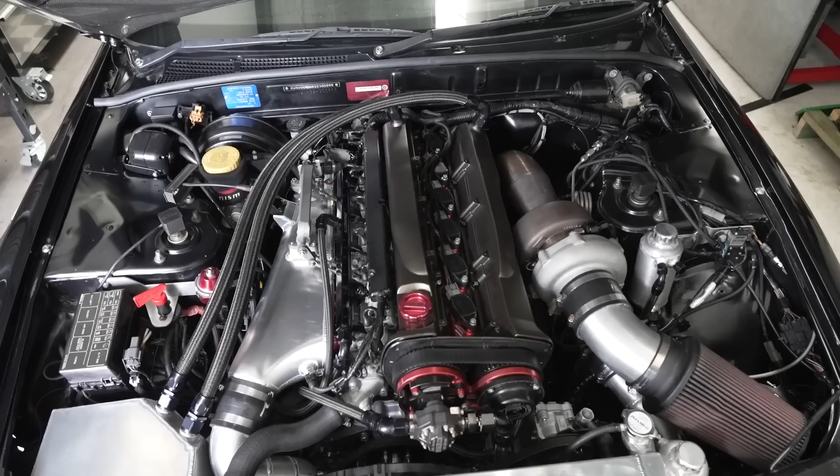In this episode of Motive's RB and GTR Tuning Guide, we talk about which oil you should put in your engine.

One of the most common questions we see asked online about the RB is what oil should I use? And the most common answers we see are, firstly, check the owner's handbook and see what the manufacturer recommends, which we think is, well, completely wrong. The next most common answer is ask your engine builder what you should use. And we think that is, well, sort of correct, mostly correct, but not always. And then there's our answer, which is put 10W60 in every single RB engine, the end, period, case closed.

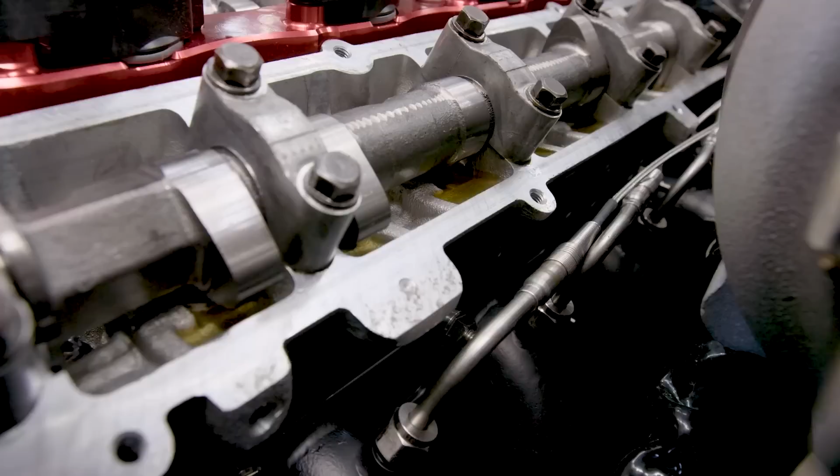Now, we have a lot of evidence and experience of why we recommend 10W60 in RB engines, and there are other people out there that are going to argue that and say that what they've done has worked as well, and we're not going to discredit anyone else's opinion on that. We're just going to show you why we think and why we have shown that 10W60 is the best option. Now, before we start talking about that, let's take a look at engine oil viscosity so you at least have a basic understanding of how it works.

Now, on the front of an oil bottle, you're going to see numbers like this: 0W20, 5W30, 15W50, 10W60, etc. So the first number with the W next to it is basically, well, the base weight of the oil. Now, if an engine oil only had that one number, it would be a pretty straightforward oil. And that's just basically a number that relates to its viscosity. The higher the number, the more viscous it is, or essentially the thicker it gets.

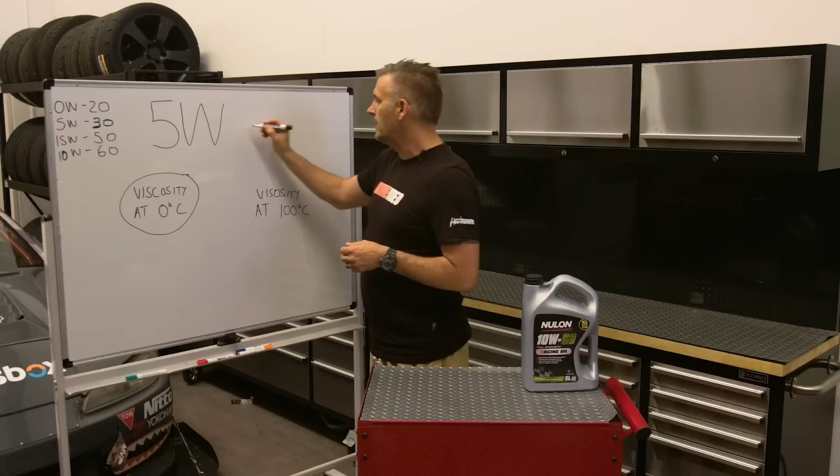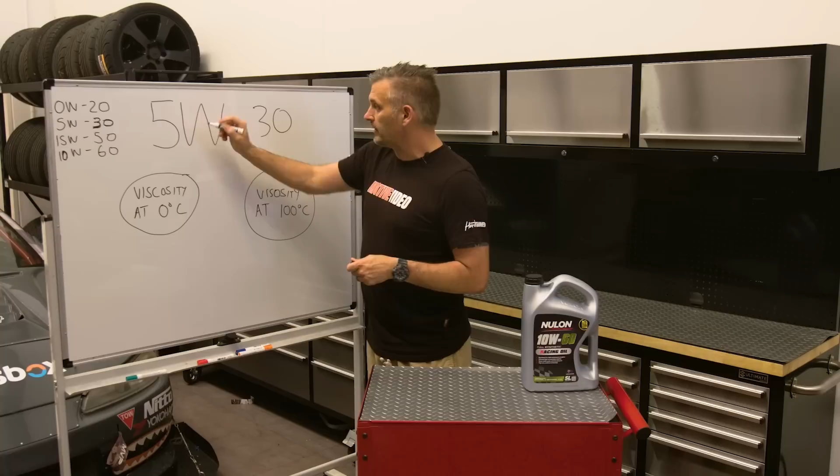But you can see here there's two numbers, and the reason they have two numbers is a multi-grade oil has the ability to have different viscosity levels when cold and hot. So this first one, the 5W, is the viscosity at 0 degrees Celsius, which is the freezing point of water. And then the 30 is the viscosity at 100 degrees Celsius, which is the boiling point of water. But this is also around about the operating temperature of an oil. So when you think about it logically, at operating temperature, this first number means absolutely nothing. Really, all that first number does is determine the viscosity during cold start.

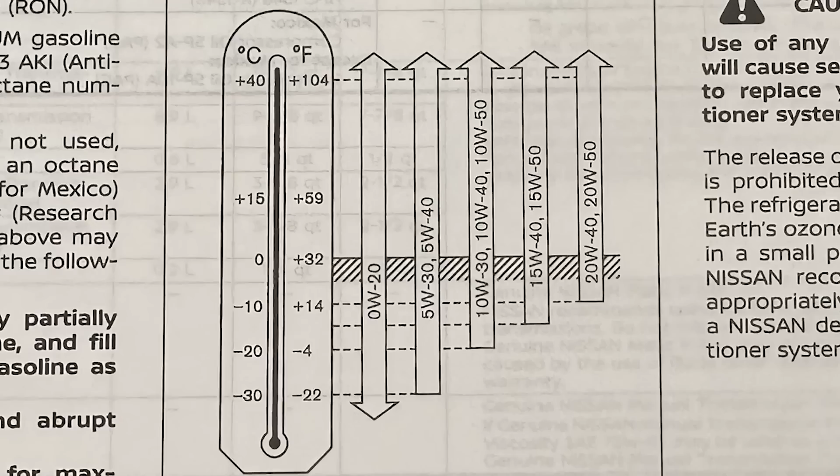So we're going to throw this graph up on the screen that you can find in pretty much any owner's handbook that shows you what grade of oil you need based on what the temperature is outside your house where you live. So you can see by that that even a 10W60, the 10W part is good all the way down to negative 20 degrees Celsius. Now, I don't know about you, but I would say out of all the RBs in the world, there's not a lot of them that get driven around in negative 20 degrees, and if they are driven around in temperature that cold, they're probably started and warmed up inside a garage where it's not that cold anyway. So realistically, the argument about 10W60 being too thick because it's cold where you live is pretty ridiculous.

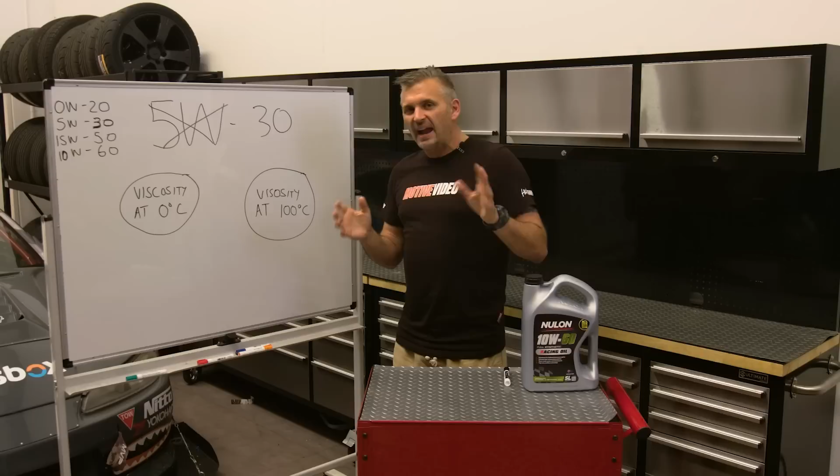So really what matters is this second number. This second number is how that oil behaves when it's at operating temperature, 100 degrees. And let's face it, most engines are going to operate between sort of 88 and 100 degrees Celsius, and quite often go over that when they're on track or any type of big power application when you're having a thrash.

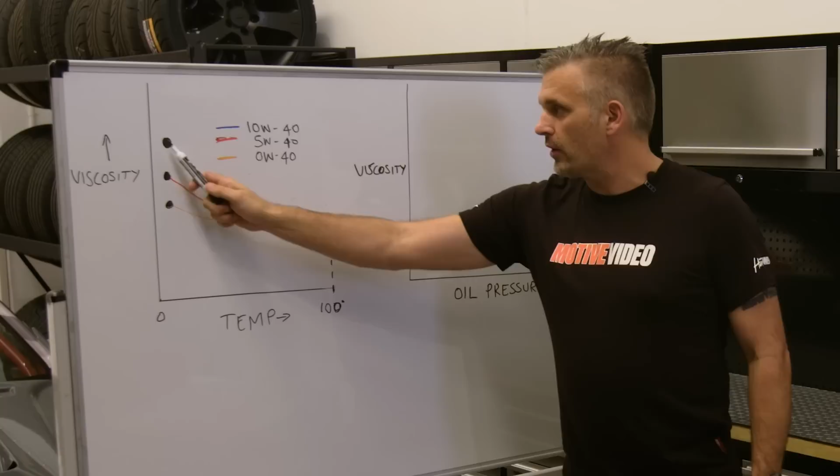So let's take a look at this graph. We've got three oil grades: 10W40, 5W40, 0W40. So they all start off with a different viscosity when cold, but they all end up the same viscosity when hot or at operating temperature. So basically, they're going to do the same job in a car that's on the racetrack or driving around. The only thing they're going to do differently is have different viscosity during cold start. And basically, if you're in a hot temperature, you'd use the 10W40. If you live somewhere that's freezing cold, you would use 0W40.

So what does this tell us? Well, it tells us that in an engine, if everything stays the same, the second number is what determines viscosity. And the other thing we also look at when it comes to viscosity is if everything in the car stays the same, as viscosity goes up, oil pressure also goes up. And this extra oil pressure is why we recommend 10W60 in all RB engines. Now, if you've ever watched the oil pressure gauge on a GTR or any RB for that matter, you'll know that they can quite often suffer from running relatively low oil pressure and struggling to hold oil pressure up top.

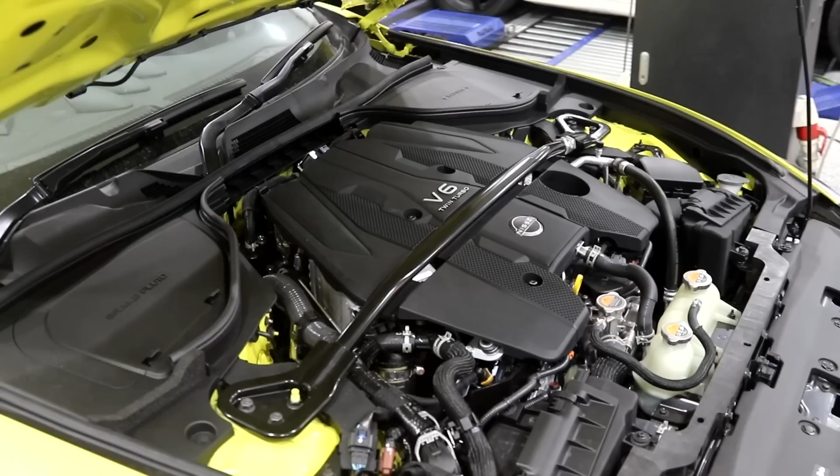Now, a lot of modern cars, on the other hand, run low oil pressure at idle and, well, often through the rev range on purpose, but that's got to do with modern construction, modern materials, and modern clearances in their engine assembly. And here's the thing, a lot of manufacturers actually run really thin oil, not because that's what the engine needs or wants or is the best for it. They often run a really thin oil to get better fuel economy and better emissions. And in this day and age, meeting emissions targets and fuel economy targets is more important than how well the car works at a racetrack.

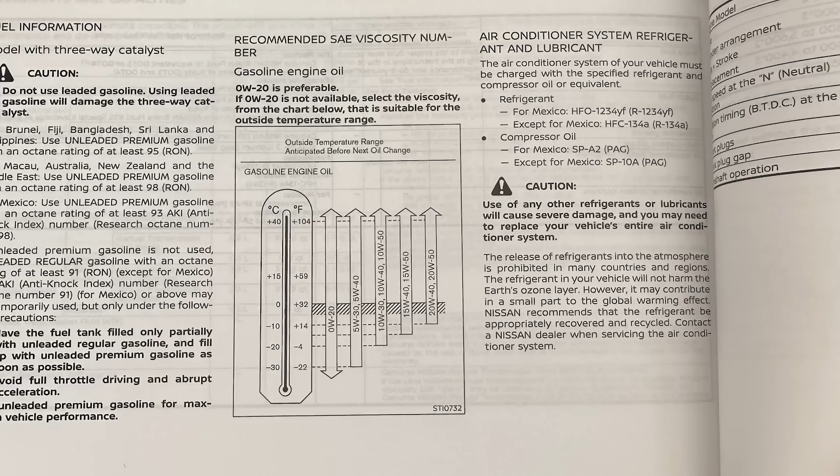Now, if you have a look inside an owner's handbook, such as the one on screen now from the Nissan Z, you can see that the manufacturer will actually tell you that you can use other viscosities, and they'll generally try and tell you which ones based on the climate that you live in.

In Australia, we live in a warmer climate, so therefore the handbook is telling us we can go to a thicker oil. Now, when it comes to modifying and racing a car, our attitude is we no longer care about fuel economy or emissions, we care about protecting the engine. And when you make more power or when you go to the racetrack, temperatures will go up beyond operating temperature. So therefore, looking after the engine by having a higher viscosity oil is what we're looking for.

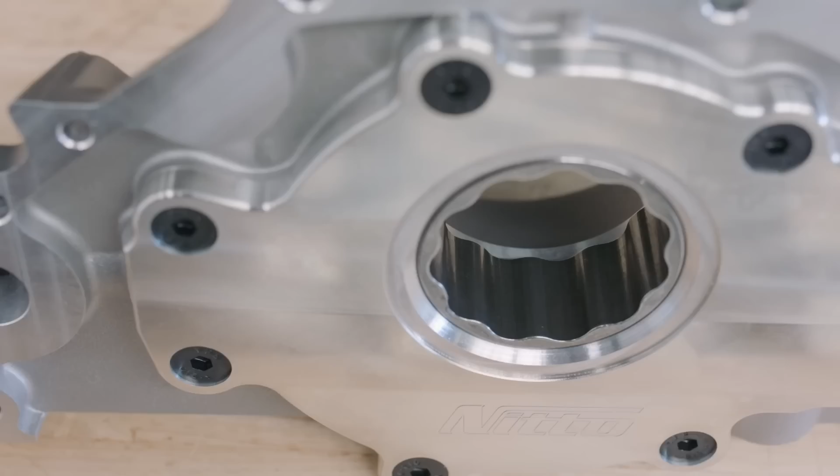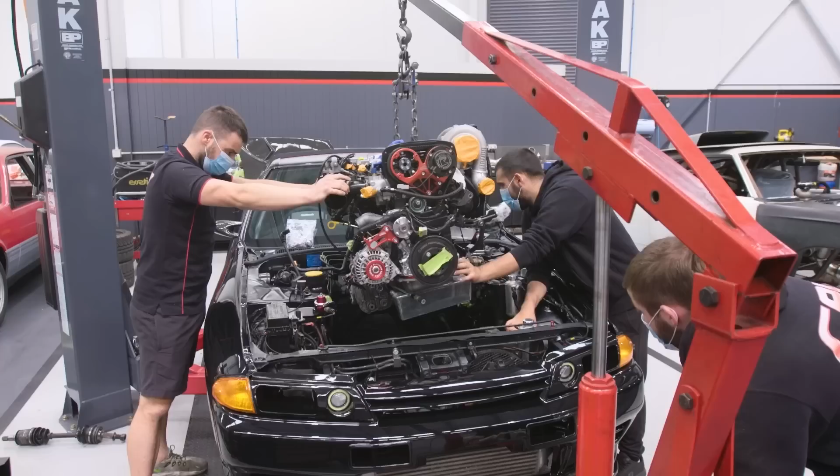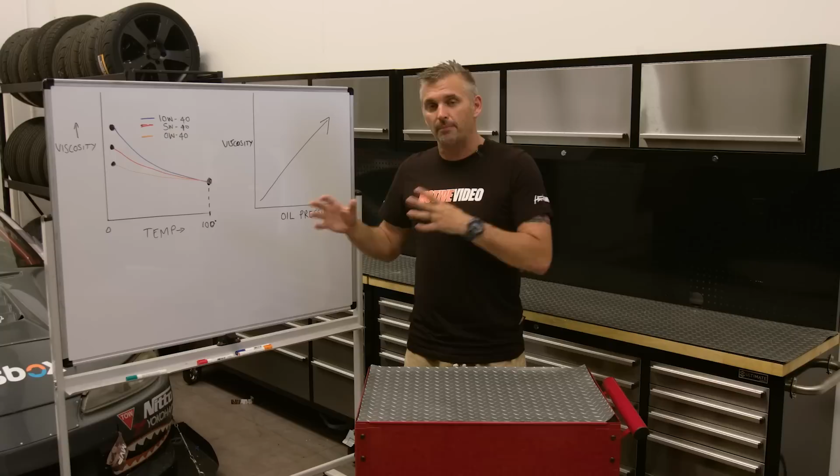Now, we know from experience that RBs love oil pressure. Having higher oil pressure than what you'd expect in an RB helps keep them alive. How do we know this? Well, from working with companies like Croydon Racing Developments, Nitto Performance Engineering, PMC Race Engines, Platinum Racing Products, Castrol and Nulon Oil, working with these companies and monitoring the wear and tear on these engines, their performance and their reliability means that we've just worked it out over the years from experience. Thicker oil and a larger oil pressure is what helps keep RBs alive.

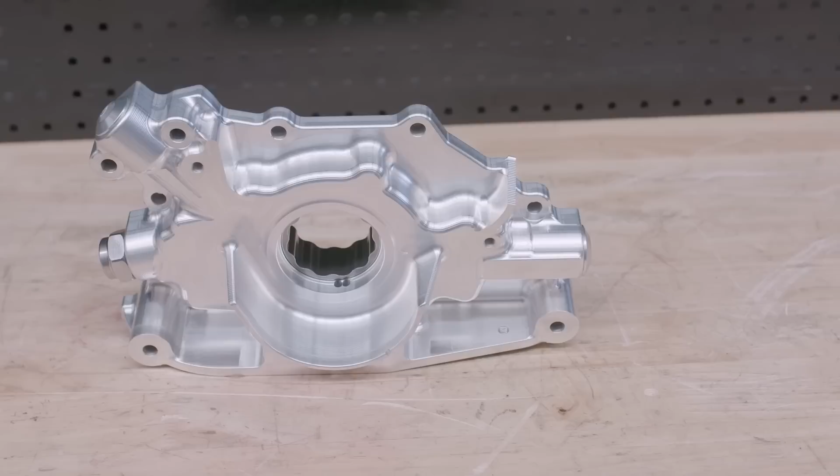And this is the reason why when you upgrade your oil pump in your GTR, when you build your engine, we always go for a higher volume or higher flowing oil pump. Why? Because it gives you higher oil pressure. Now, our GTR, when we had the stock bottom end, we were lucky if oil pressure would peak at 60 psi and it would struggle to stay over 50 psi above 8,000 RPM.

But on our current built engine with the Nitto billet oil pump, we're seeing 90 psi, even on 1,100 horsepower and 9,500 RPM. And at idle, at operating temperature, it's already at 60 psi. In fact, we see over 130 psi when the car is cold and we first start it up at idle. So you can tell if that's how CRD and Nitto are setting it up, then that's exactly what the RB likes to have. Now let's go into even more experiences we've had with RBs when it comes to oil.

Now, back in 2005 when Castrol launched Edge Oil in Australia, we were involved with their technical team in making some training and technical videos about their new Castrol Edge Oil. And one of the cars they were testing oil in was Theo Woolett's 1,000 horsepower R32 GTR. And we were privy to a lot of samples and results of testing oil in that car. And basically, the technicians at Castrol came back and said, the RB loves 10W60.

It was more of the same working with Nulon Oils, who also have an oil sample testing program. And we were involved in a couple of time attack cars that were giving back oil samples running anything from 0W40 to 5W50 and then 10W60. And the results with 10W60 showed better bearing wear and the engine was more reliable. So our theory behind using 10W60 isn't just based on our own car, it's based on results that we've seen with oil companies as well.

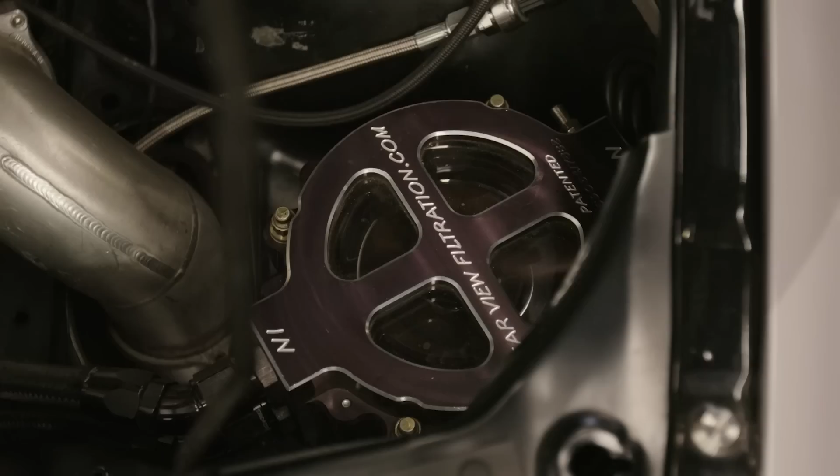Now, since we switched from stock bottom end over to a 3.2 litre built engine that makes 1,100 horsepower, one thing that we do have with this combination is a clear view filter. So we are able to monitor the bearing wear on this engine since we put it all together. And honestly, since it's been put together, we've had basically no bearing wear, no material in the filter, and nothing to worry about. So just more proof that the Nitto billet oil pump and huge oil pressure with 10W60 is what's helping keep this engine happy and reliable.

So, should you switch your RB over to 10W60? If you ask us, it is simply yes. However, you do need to remember this. If you have some type of issue with your engine giving it low oil pressure, 10W60 isn't some band-aid that's going to fix everything. You might need to actually fix your issue, such as bad bearing wear giving higher clearances, or some type of damaged or worn out oil pump.

Now, if your engine builder says to use a different viscosity, listen to your engine builder and your tuner. Your warranty is with them. We're not going to argue and say that they're wrong. We're just telling you what our experience is using 10W60 inside RB engines. And that is, more oil pressure, the better.